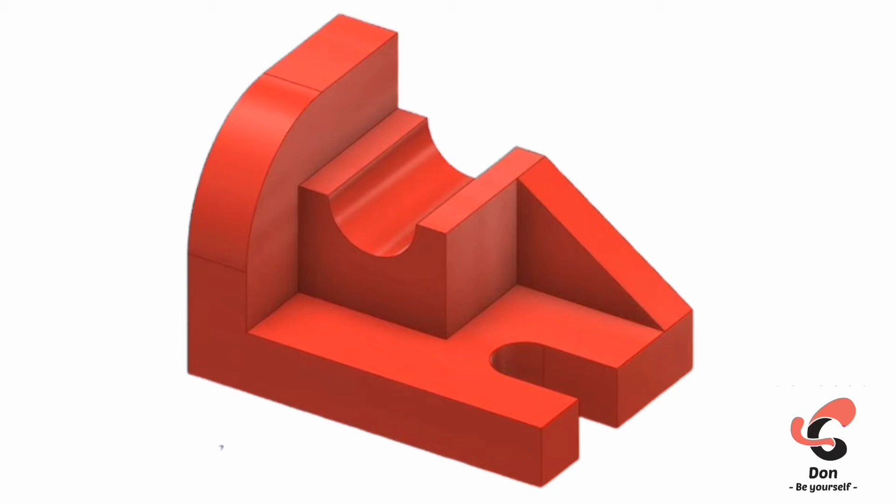Hi friends, this video is useful for Fusion 360 beginners. We're going to make this 3D model. After watching this video, you'll get an idea on hole and rib.

First go to Fusion 360, click plus icon, click new sketch. Select the top plane. In this diagram, we'll draw it in simpler way. Draw a rectangle, press R.

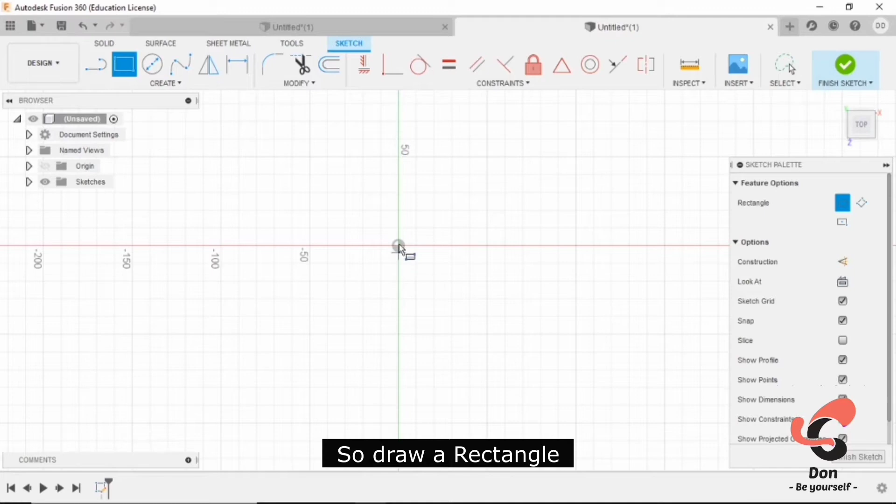In the diagram, the top view looks like two rectangles. So draw rectangles as shown. Press L, draw lines as shown. Next draw arc, press S.

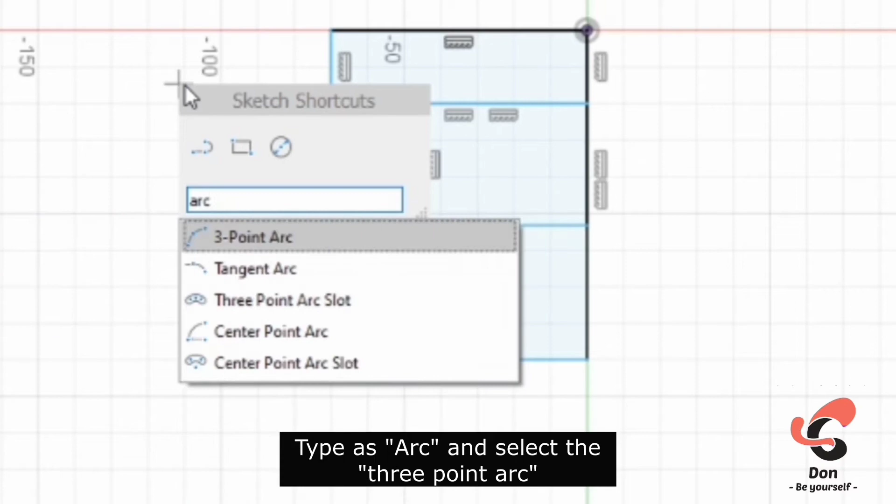On keyboard type arc. Select 3-point arc. Click on ends of two lines and third point anywhere. Next remove excess lines. Press T, select the line shown.

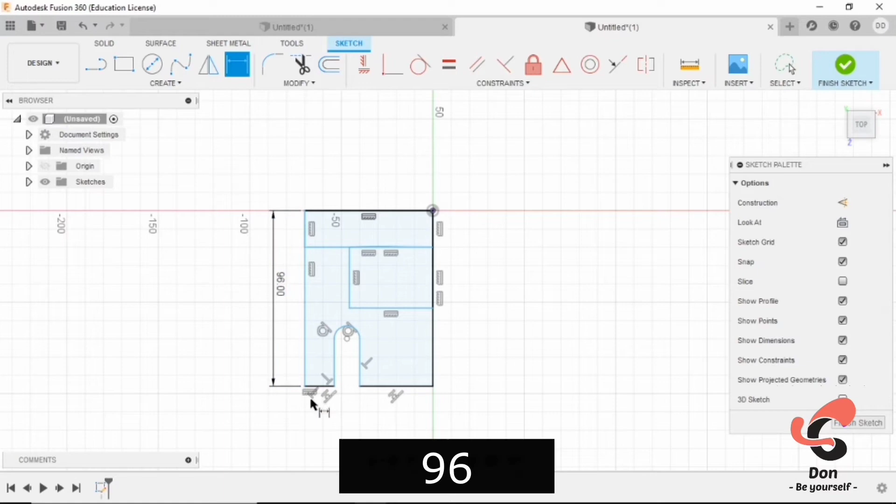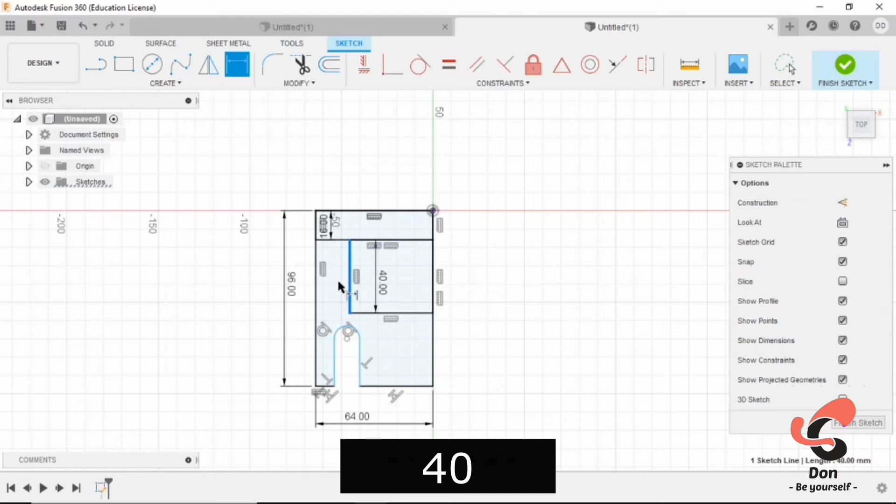Next give dimension as per dimension. Click the dimension icon or press D. Dimensions: 96, 64, 16, 40, 22, 16, 16, 20.

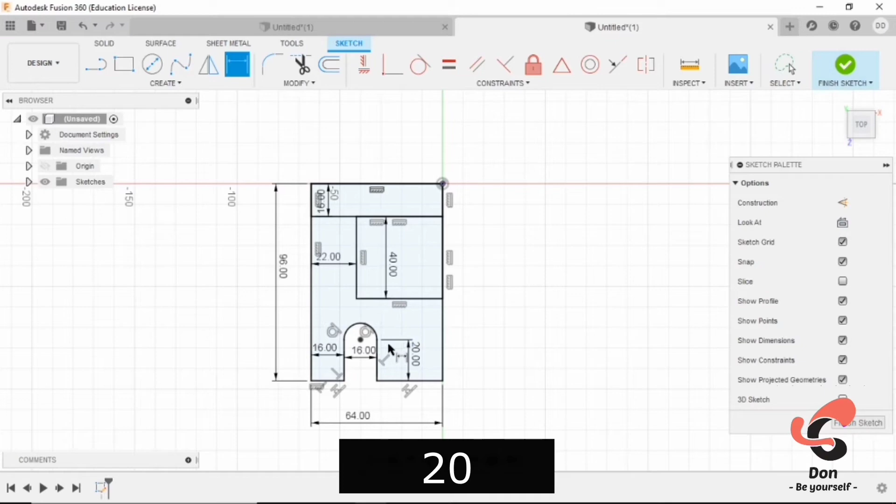That's it, our basic sketch is ready. Click Finish Sketch icon to exit sketch. Click Extrude icon or press E. Select all the faces.

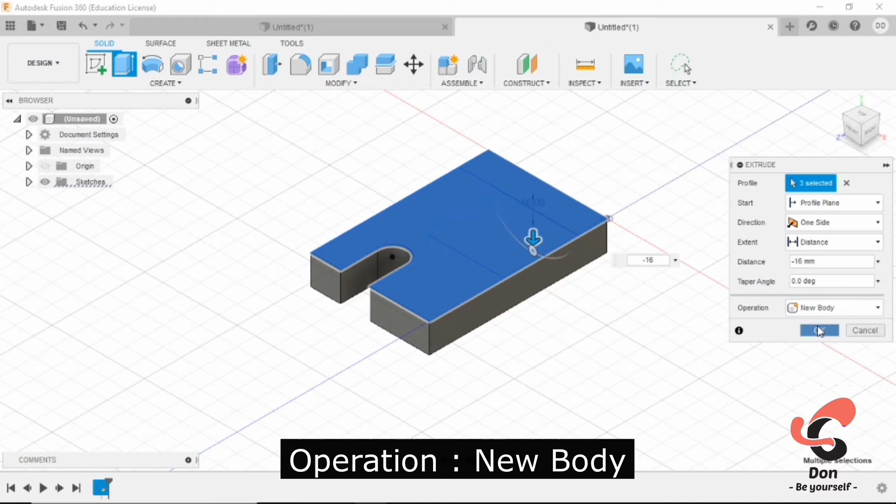Distance 16. Operation, new body. Click OK, our base is now ready. And see the sketch. Again click Extrude.

Select this face. Distance 48. Operation, join. Click OK. Again click Extrude.

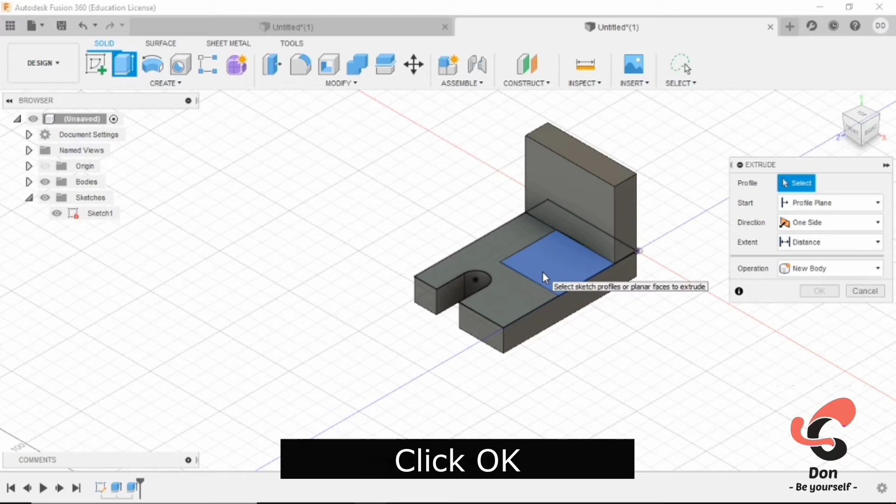Select this face. Distance 28. Operation, join. Click OK.

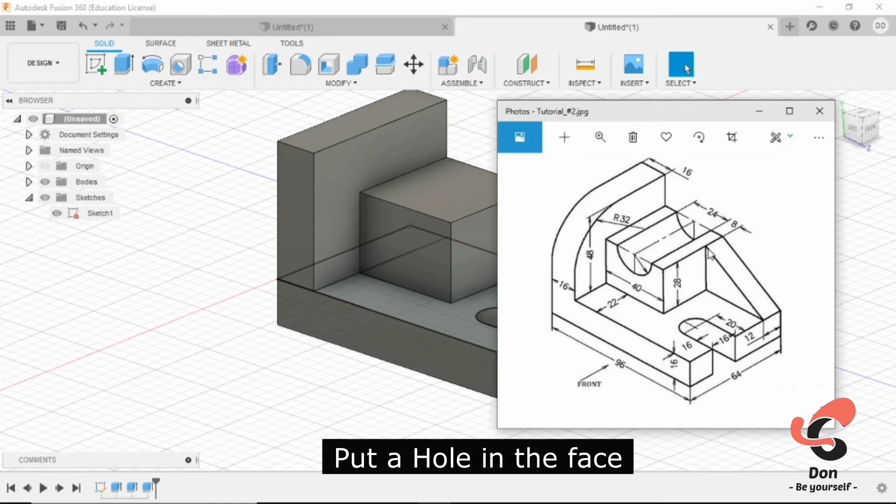Next in the diagram there's a half cylindrical hole. For this click hole or press H. Select this face. Reference. Select this line.

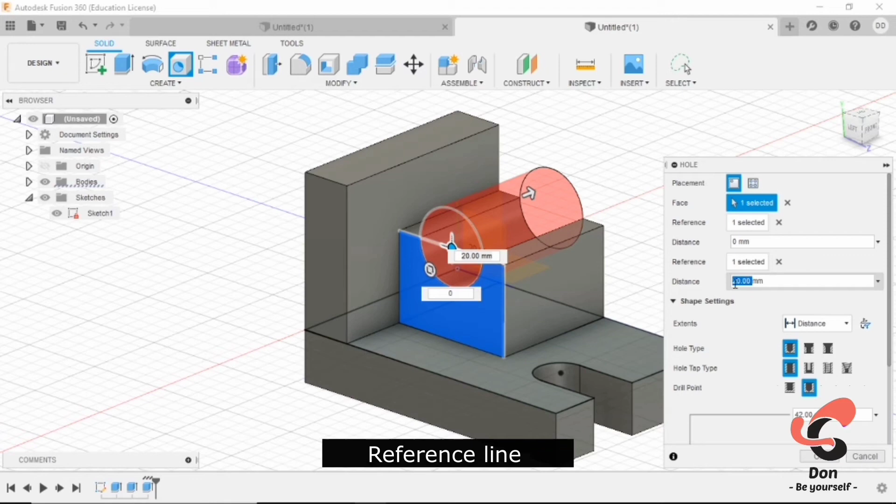Distance 0. Reference. Select this line. Distance 12 plus 8. Extents all. Hole diameter 24. Click OK.

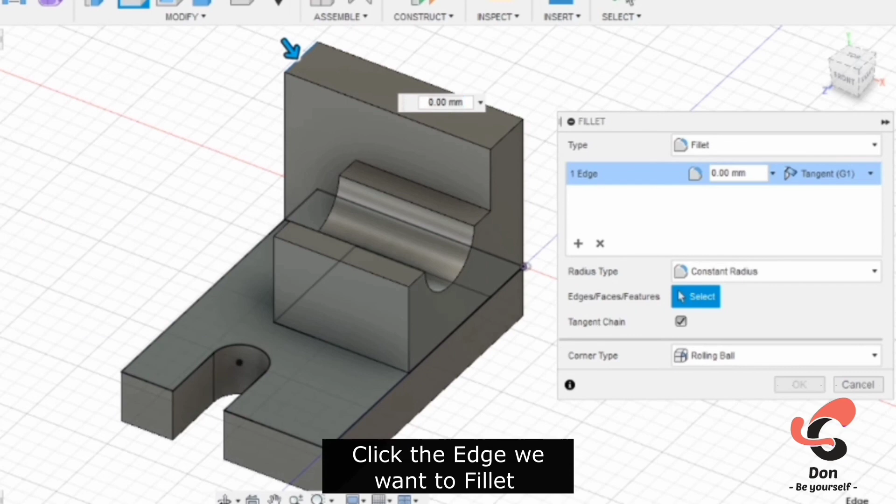Next click on fillet icon or press F. Select this edge. In the diagram, radius 32. Click OK.

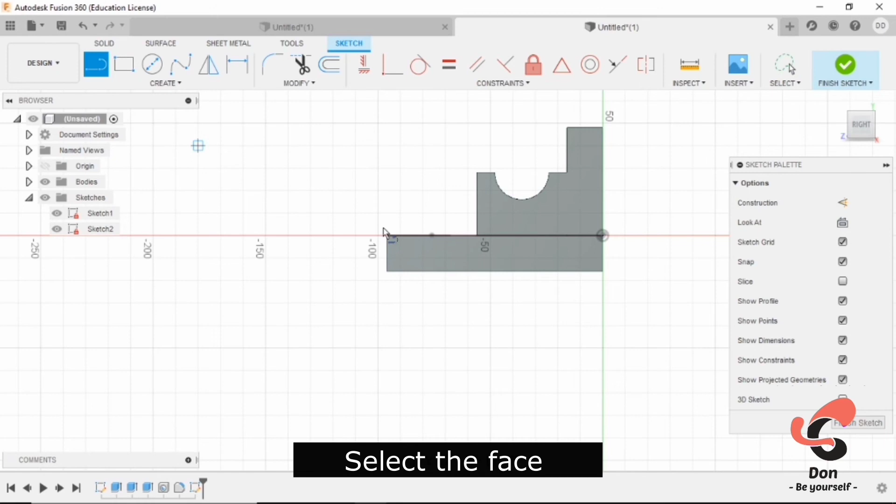In the diagram there is a rib. We want to create rib. Click new sketch. Select this face. Click line or press L. Draw a line on edges shown. Click Finish Sketch.

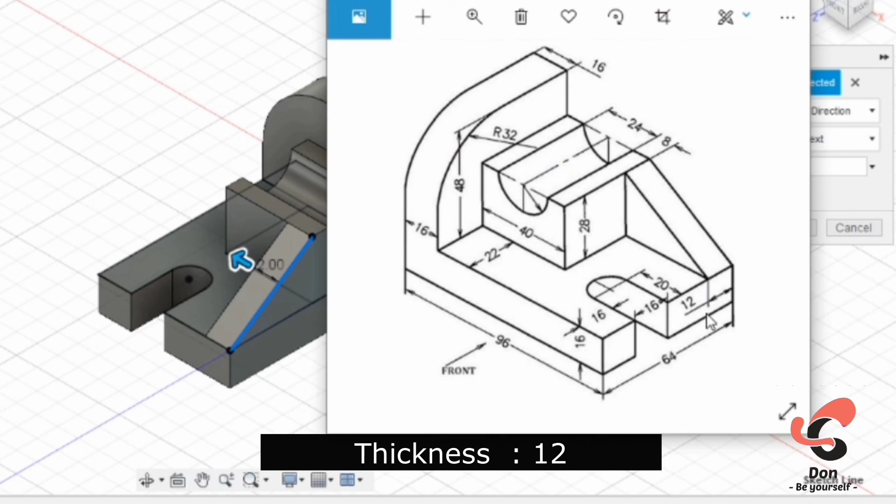To create a rib, click Rib under the Create section. Select the line. Thickness options: one direction. Depth option, to next. Thickness 12. Click OK. Our 3D model is ready.